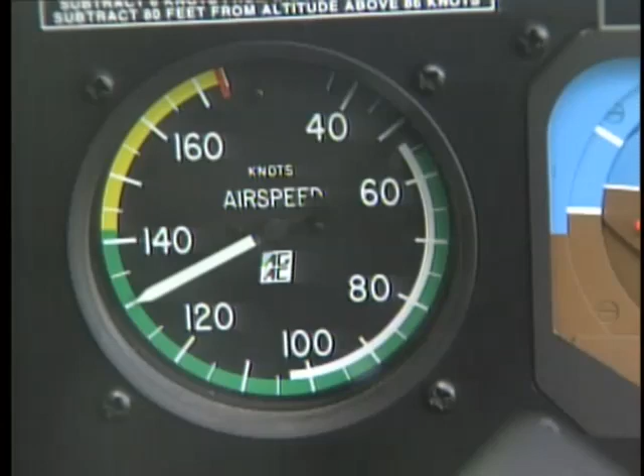The reason that the aircraft instruments are color-coded is to direct your attention, as the FAA says, to approaching operating difficulties. What that basically means is that for engine instruments, you'll have colored arcs, green arcs for normal operating range, yellow arcs for caution areas, red lines for you don't want to operate above or below this as far as temperature or pressure is concerned. And also on the airspeed indicator, you've got color-coded arcs. And the reason is so that the pilot has, at a real quick glance, information about whether he's operating in an area in a spectrum where he should be.

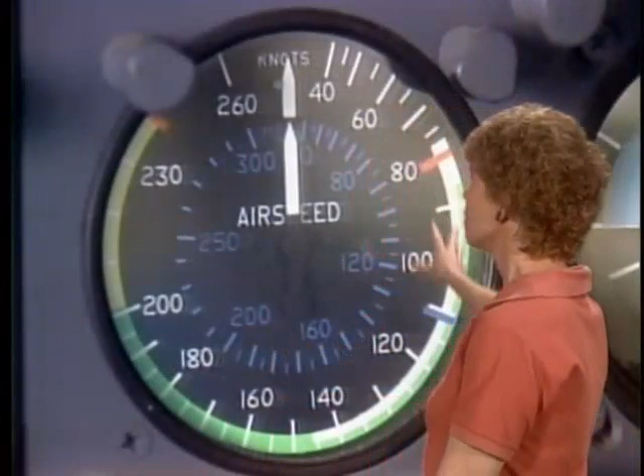Now, those aircraft instrument range markings, as the FAA calls these colored arcs, are specified by federal aviation regulations. It's not just a case of the manufacturers got together and said, let's do it this way. The federal aviation regulations require that those range markings, those colored arcs, be on there. A couple of instruments that you'll see that have those range markings on them are the airspeed indicator. Notice we have white arc, green arc, red lines, yellow arc, a blue arc, and so on there. And also another place you're going to find it is the cylinder head temperature gauge. Temperature gauges very typically have those colored arcs also.

So the red radial line on any instrument indicates the maximum, or if it's on the bottom end, the minimum safe operating limits. Now, airspeed indicators for twin-engine airplanes have, among other markings, a blue radial line. And what that blue radial line indicates is the best rate of climb speed with one engine inoperative. On a multi-engine aircraft, it's very important to know very quickly what the best speed is, the best rate of climb speed, if you have an engine failure. And they don't want you to have to look it up in a book or search for a placard, so they mark it right there on the airspeed indicator with that blue radial line.

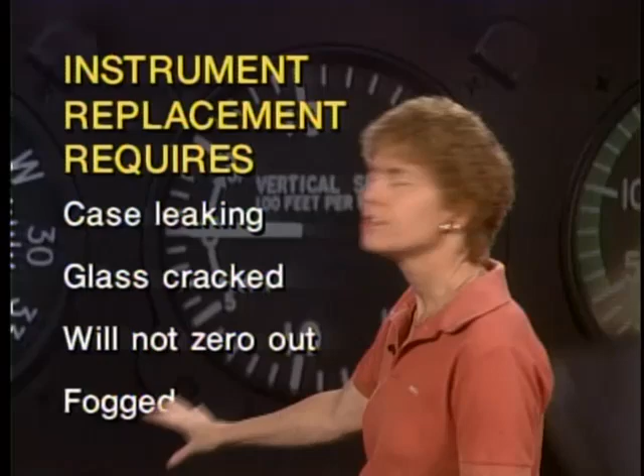But there are some instrument discrepancies that would require replacement of the instrument instead. Discrepancies that would require instrument replacement would be: the case itself is leaking, the glass in the instrument is cracked, the instrument will not zero out, or the instrument is fogged. These kinds of problems will require replacement of the instrument, and they're not the type of thing that an aviation mechanic can work on. Now, a certificated mechanic can perform 100-hour inspections of instruments.

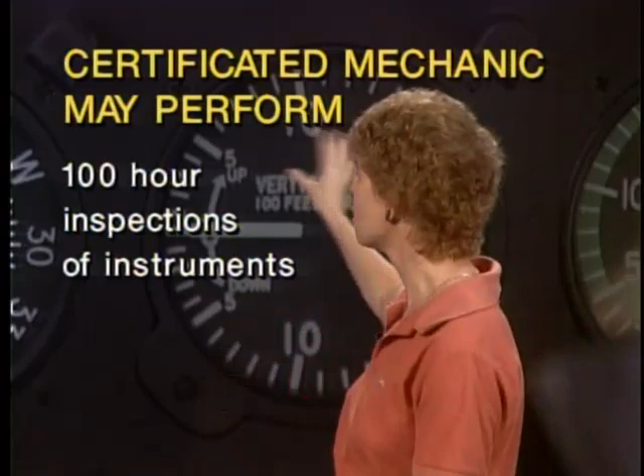You are allowed, and indeed you must, inspect the instruments when you do various inspections and see whether the instruments look like they are complete and whole and whether they're functioning properly. However, a mechanic, even if he's got an airframe and a power plant rating, may not perform repairs on aircraft instruments. A mechanic cannot perform repairs on engine instruments, or for that matter on flight instruments. That has to be done by a repair shop.

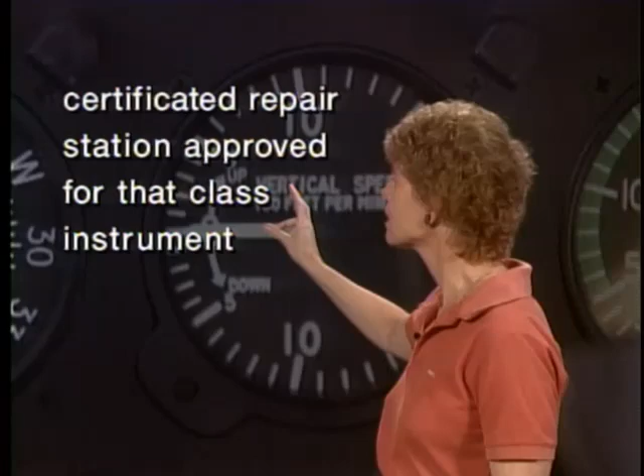So basically what the mechanic does is inspect the instruments, see if there's any problems, and if there are problems which would require taking the instrument apart in order to fix it, then he's going to simply have to replace it and let a repair shop do any repair work or overhaul on the instrument that needs to be done. Because repair of an aircraft instrument can only be done by a certificated repair station that is approved for that class of instrument. An aviation mechanic cannot repair instruments. Only a repair station can do that, and they have to be approved for that class of instrument.

Okay, let's talk about the instrument panel. The panels that you mount the aircraft instruments in are usually shock mounted, and the reason for that is to absorb low frequency, high amplitude shocks. You need to remember those two words, low frequency and high amplitude, because those are the type of shocks that you put the instrument panels on shock mounts in order to absorb.

Now, how many shock mounts are you going to have? Well, the number of shock mounts that are needed for an instrument panel installation is determined by the weight of the complete panel unit. And by complete panel unit, that includes the instruments, but it also includes all of the sheet metal and so on. So the weight of the complete unit is what determines how many shock mounts you're going to need.

That aircraft instrument panel, by the way, needs to be electrically bonded to the aircraft structure. And the reason that it is electrically bonded to the aircraft structure is not to keep it from bouncing around, that's done by the shock mounts, but it's to provide current return paths. That's the reason for electrical bonding.

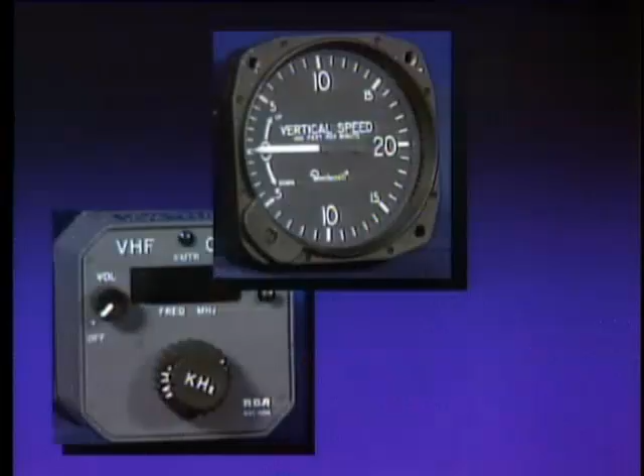Now, the way that aircraft instruments are mounted in their panels depends on how the instrument case is designed. If you've got an instrument like this vertical speed indicator that has a flange on it, then what you use is mounting screws going through that flange. But sometimes what you'll have instead is a flangeless instrument case, and we've got a sample of that here in this radio case.

Notice that there is no flange around it, and if you have a flangeless instrument case, the way it's mounted in an instrument panel is there is an expanding type clamp that is secured to the back of the panel. You slide the instrument in, and then you tighten that clamp around the instrument, in this case around the radio, by a screw from the front of the instrument panel.

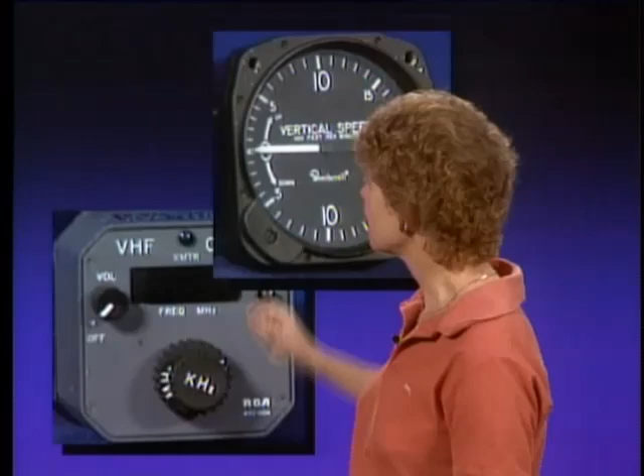So with a flangeless instrument case, what you've got is an expanding type clamp on the back of the instrument panel, and that clamp is tightened down around the instrument by a screw, and you do that from the front of the instrument panel.

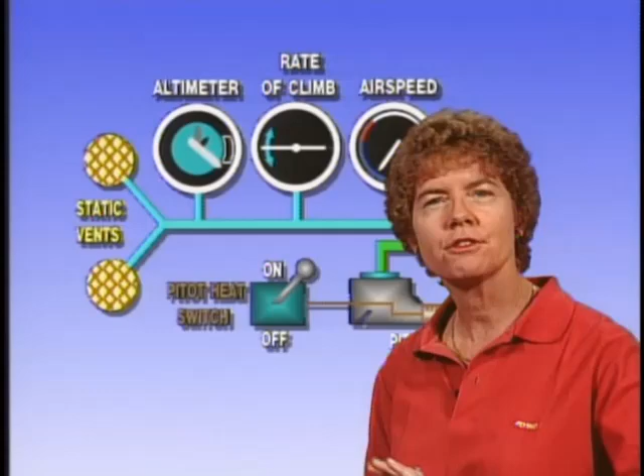Let's talk about the altimeter and the other instruments that are connected to the aircraft's pitot-static system. There are 3 flight instruments that are connected to the pitot-static system, and those are the altimeter, the rate of climb or vertical speed indicator, you'll see both terminologies, and the airspeed indicator.

The pitot-static system has a static vent on either side of the fuselage joined together in a Y, and the reason you've got one on either side is so if the plane yaws one way or another, the increased pressure on one side will be made up for by the decreased pressure on the other. So you'll have a pretty good accurate reading of ambient pressure.

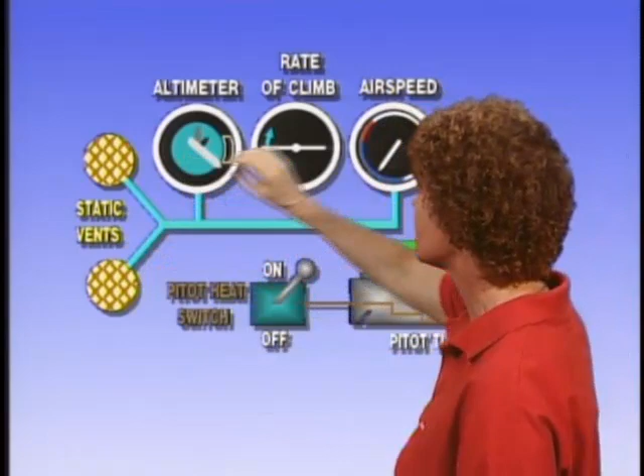They join together and run forward to give static air, static pressure to the altimeter, the vertical speed indicator, and the airspeed indicator. Now notice that the airspeed indicator is the only one of these that has ram air coming in through the pitot tube. And what the airspeed indicator is doing is taking this ram air coming in through the pitot tube and comparing it against the ambient or static pressure air, and the difference gives you the airspeed indication.

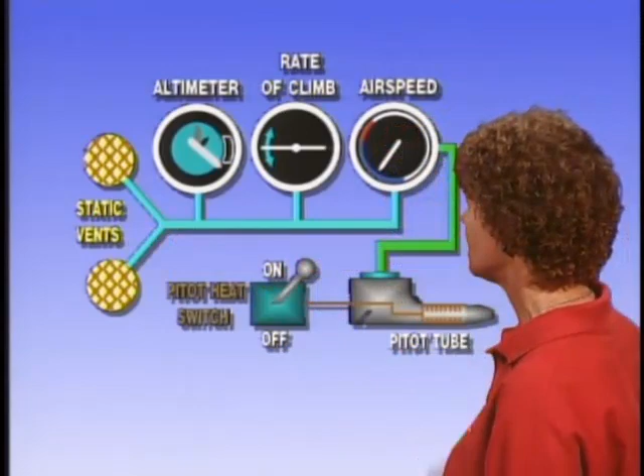On the vertical speed indicator and on the altimeter, they're simply sensing the ambient pressure, and telling you whether you're climbing or descending, and giving you your altitude above mean sea level. Normally is how the altimeter is set to give us our altitude. So there are 3 instruments connected to the pitot-static system: the altimeter, vertical speed indicator, and airspeed indicator.

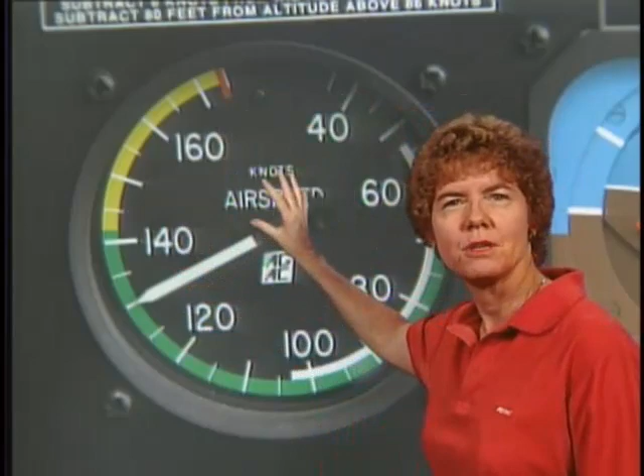But suppose the FAA asks you which of these instruments are connected only to the aircraft's static pressure system. There are 2 of them that are only connected to the static pressure and not to the pitot or ram pressure, and those 2 are the altimeter and the vertical speed indicator or rate of climb. The airspeed indicator is connected to both the ram air, the pitot air, and the static air pressure. And by measuring the differential, as I said, between the pitot pressure and the static air pressure, it will tell you what your indicated airspeed is.

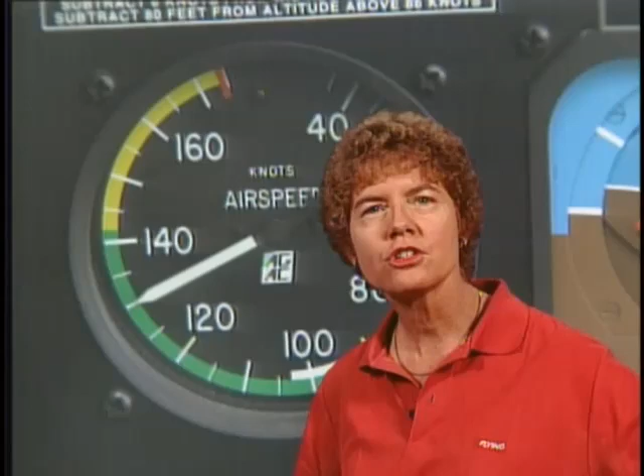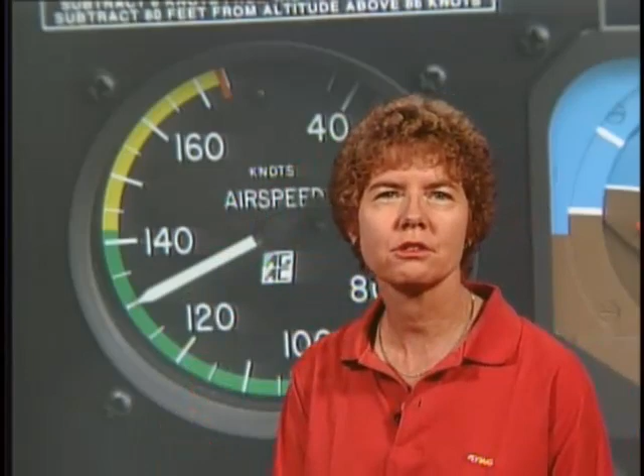Now, both the ram air and the static air are external air sources outside the cabin of the aircraft. So cabin air pressure has no effect on the airspeed indicator whatsoever unless you have a certain kind of problem. Suppose that you have a pressurized aircraft. And the static pressure line became disconnected inside that pressurized cabin during cruising flight.

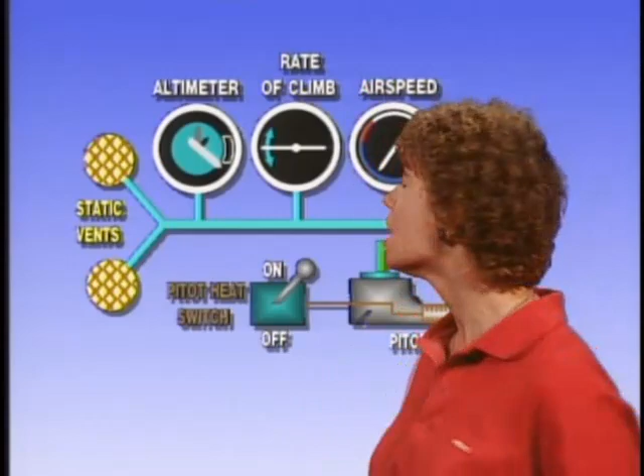The question is, what will happen to the altimeter and the airspeed indicator if this static line becomes disconnected in a pressurized cabin? Well, the whole idea of a pressurized cabin is that while you may be flying at, say, 20,000 feet, you'll only have a cabin altitude of, say, 6,000 feet. It's pressurized to give you a lower cabin flight altitude. If the static line becomes disconnected in the cabin, then it's going to be filled with air at the cabin pressure, which is a 6,000-foot cabin, and not the external air pressure of, say, 20,000 feet.

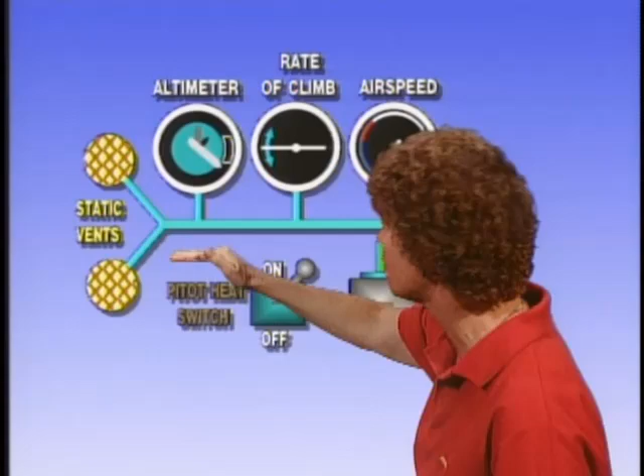So if you have pressurized air inside the static vent from a pressurized air cabin, what will happen is that the altimeter will read the same as the actual cabin altitude, not your flight altitude, and the airspeed indicator will be wrong. The altimeter will read low because the cabin altitude is 6,000 feet instead of 20,000 feet, so it'll read 6,000 instead of 20,000.

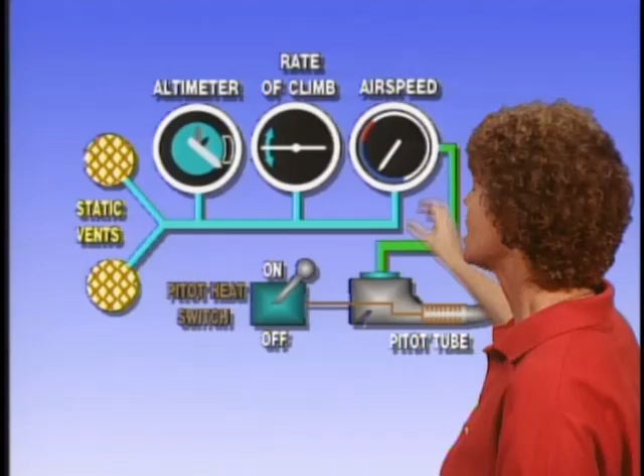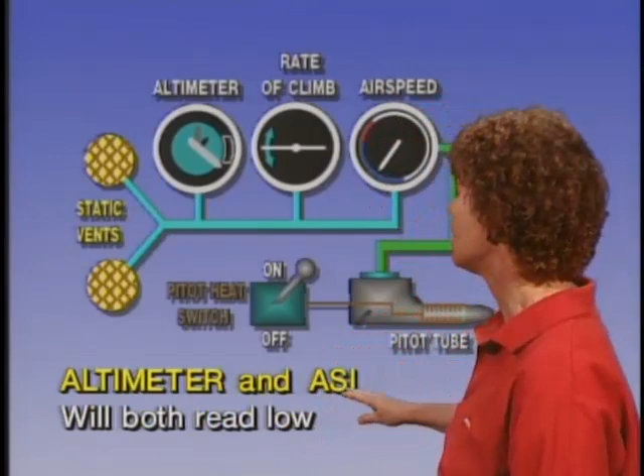The airspeed indicator is taking the ram air coming in here and comparing it against the air in the static vent, but if the air in the static vent is pressurized cabin air, it's going to be a much higher pressure than you would expect, and the difference will be much less, and the airspeed indicator will read low. So if the static pressure line is disconnected inside a pressurized cabin in cruising flight, the result you'll get is that both the altimeter and the airspeed indicator will read too low.

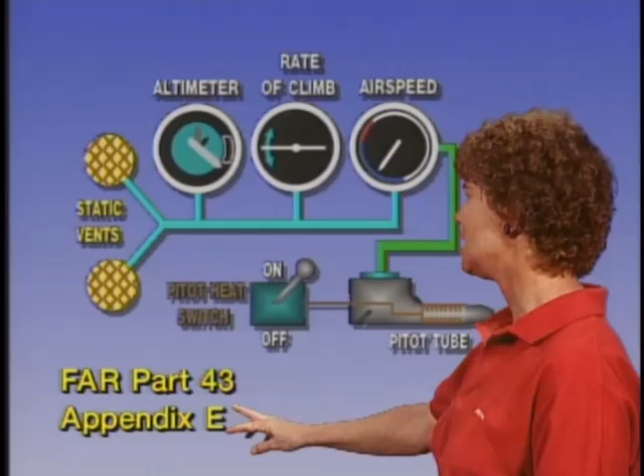Now the static system, the pitot-static system, has to be tested and inspected according to regulation. The regulation that requires it is FAR 91.411. But the requirements on how to test it and how to inspect it, they want you to know where to find those, and you find those in FAR Part 43, Appendix E. FAR Part 43, Appendix E is what tells you how to test the static pressure system on an aircraft.

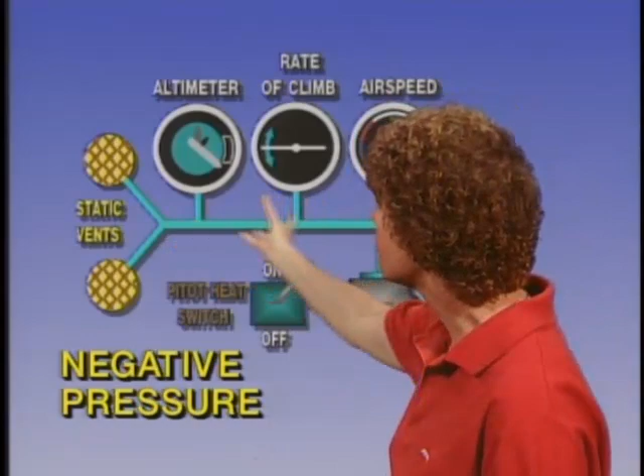One of the things that it tells you is that when you're performing the static system leakage test, what you're using is suction, or as they say on the test, negative pressure. You apply suction in the static lines, and what you're doing is you're checking for leaks. Does the system leak? Will it hold the suction without giving erroneous readings? If you test this system for leaks in compliance with the regulation, you can do it one of two ways.

You can use a pitot-static system tester that has altimeter and VSI indication, or you can actually use the aircraft altimeter instead. What you do is you apply the suction onto the static system and you watch and see what the aircraft altimeter does. You apply a suction to an equivalent altitude, and they'll tell you on the tester exactly what that equivalent altitude is, and then you hold the system there and you look for the rate of change on the altimeter. What you're looking for is, does the altimeter move when you're not actually changing the suction? That will tell you whether or not you have a leak.

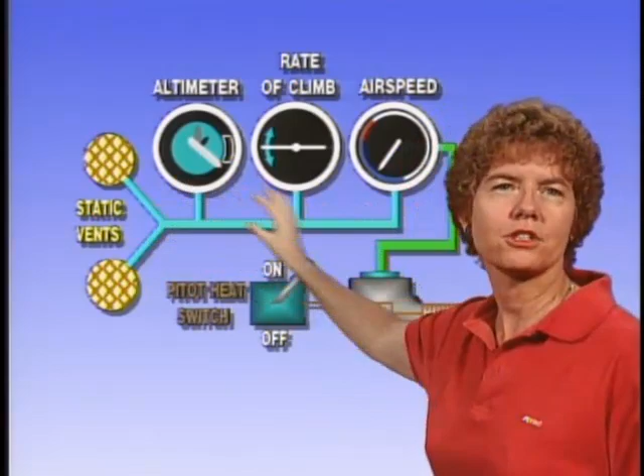The maximum altitude loss that is permitted when you're doing this instrument static pressure integrity check, leak check, is 100 feet in 1 minute. So if the altimeter is showing more than a 100-foot change in 1 minute, then you've got excessive leakage in that instrument system. Now, if the static pressure system does show excessive leakage, how do you locate it? You locate the leaks by going in and isolating different parts of the line, and then you test each portion systematically, starting with the instrument connection, to try and figure out exactly what segment of the lines, what segment of the connections the leak is located in.

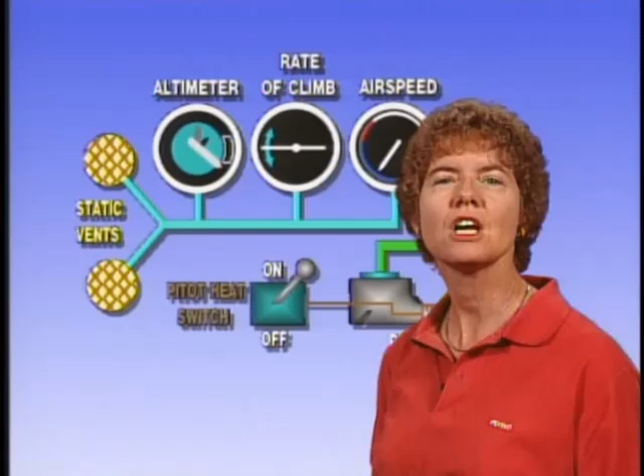Now, they want you to be familiar with the concept of pressure altitude. A barometric altimeter like this will indicate pressure altitude whenever the scale on the altimeter is set to 29.92 inches of mercury. And it doesn't make any difference whether you're on the ground or in flight. If you go to the setting window on the altimeter and you set it to 29.92 inches of mercury, the altimeter will be telling you your pressure altitude. And that's important because you use it for some diagnostic information and also as a pilot to find out how the aircraft is going to be performing.

A different type of altimeter other than the barometric altimeter is a radar altimeter. And what a radar altimeter does is it transmits a signal from the aircraft which goes down to the ground and is reflected back to the aircraft. And the instrument analyzes that signal and says, okay, I am 100 feet, 500 feet, 800 feet, 1,000 feet above the ground. So rather than knowing your altitude just above sea level, the advantage of the radar altimeter is it tells you how high you are above the ground that you're passing over at the moment and helps an awful lot in obstruction clearance.

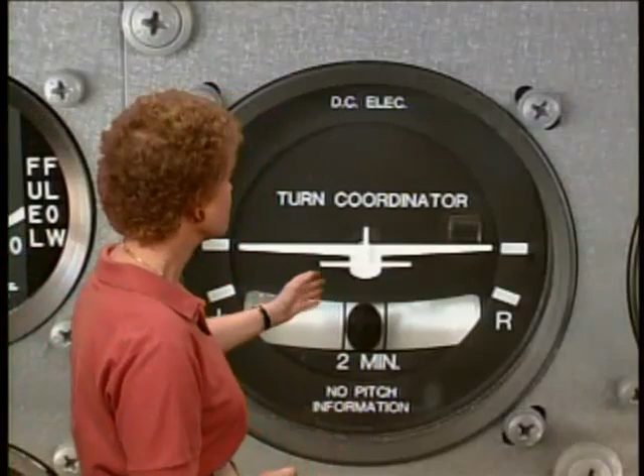Now, one of the flight instruments in the cockpit is a turn coordinator, and the turn coordinator tells two pieces of information. It tells about roll and it tells about yaw. As far as roll is concerned, it tells you whether you're rolling into a left-hand turn or whether, as in this case, you're rolling into a right-hand turn. Notice how the right wing of the aircraft goes down, showing a right-hand turn.

So that's the roll. The second thing, as I said, is the yaw indication, whether the nose of the aircraft is yawing to the left or to the right, and it does that with this ball in the tube down here, and it does that by having the ball out to one side or another, depending on which way the nose of the aircraft is yawing. What the turn coordinator does not tell you, and it says right on it, is no pitch information. It does not tell you whether the nose of the aircraft is pitched up or pitched down.

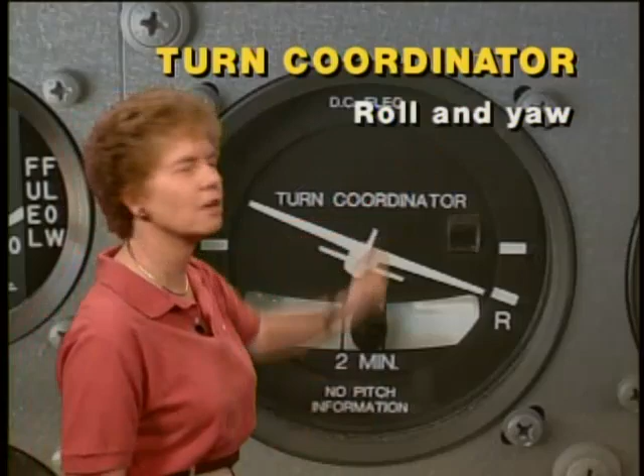What it does tell you is roll and yaw information. Now, when you look at all of the flight instruments in the aircraft panel, in addition to the turn coordinator that we just talked about, there's two others that are gyroscopic instruments controlled by gyroscopes, and that is the attitude indicator and also the heading indicator. So there are three instruments total. Need to remember that number, three of them, that are controlled by gyroscopes.

The attitude indicator, which is often called the artificial horizon, the heading indicator, or the directional gyro, which tells you which direction the airplane is flying, and in older instruments, the turn needle of the turn and slip indicator, which works just like the turn coordinator, but has a needle instead of a little airplane.

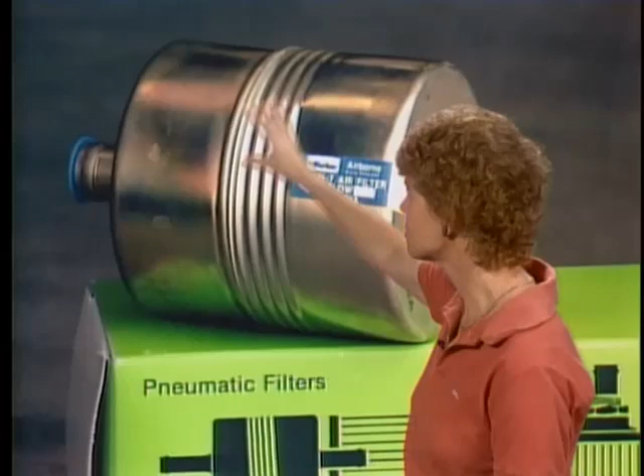Now, the heading indicator and the attitude indicator are normally vacuum-operated instruments, and the vacuum system is very touchy as far as needing clean air is concerned. They have dry-type vacuum pumps with carbon vanes very commonly, and those dry-type vacuum pumps with carbon vanes are very susceptible to damage. What they have to have is good filters on them. Here's the master filter for a vacuum system. The pumps are very susceptible to damage from solid airborne particles, and they have to take in only filtered air. They need a good filter on there to make sure that they don't get contaminants in there.

Now, if you're looking at a vacuum-operated instrument and you find that the glass is loose on that instrument, can you as a mechanic repair it? No, you're not allowed to repair instruments. You're going to have to install another instrument, because remember that only instrument shops are going to be able to work on the instruments. A repair station that's licensed for that class of instrument is going to have to do the repair. What you're going to have to do is install another instrument.

Now, the condition that is most likely to cause excessive vacuum in a vacuum system is the vacuum relief valve not being properly adjusted. If the vacuum relief valve is improperly adjusted, then you could end up with excessive vacuum. You set it for what the system pressure ought to be, and if it's not set properly, then you can get too much vacuum.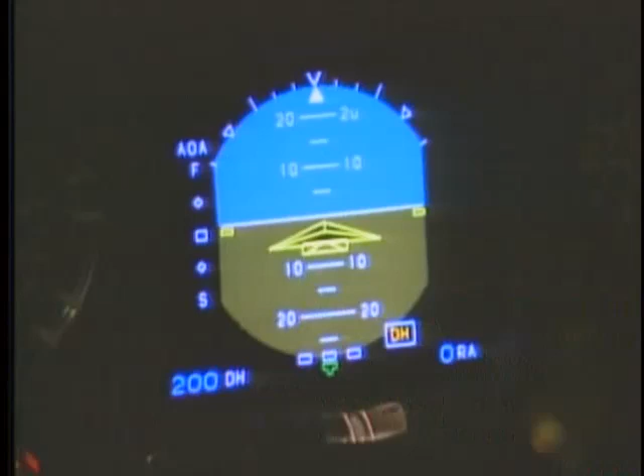Now, this is the wave of the future on instruments, the electronic flight instrument system. An electronic flight instrument system, or EFIS, uses sunlight-readable CRTs like this in order to display data and also representations of aircraft instruments. By using the EFIS, they eliminate all kinds of mechanical instruments, and it relieves pilot workload and instrument panel clutter, because the advantage of an EFIS like this is it only displays the information that you need at the time, and you can change what is displayed on it.

And if you have some kind of mechanical problem with the aircraft, then and only then will the appropriate instruments and gauges and so on show up on the CRT. Now, there are 4 elements in an EFIS system, and you need to know this for the test. The elements are the CRT display, the symbol generator, the display controller, and the source select panel.

The CRT display is this screen that we've been looking at. What happens is that data that is transmitted between the different components in the EFIS is converted into digital or alphanumeric signals. That data is then displayed on the CRT, the cathode ray tube, and it's displayed as both alphanumeric data and also as representations of aircraft instruments. In other words, you'll actually see a symbol, a picture of a particular aircraft instrument, or you will see alphanumeric data depending on exactly what you need to be looking at the moment. And that's all displayed on the CRT.

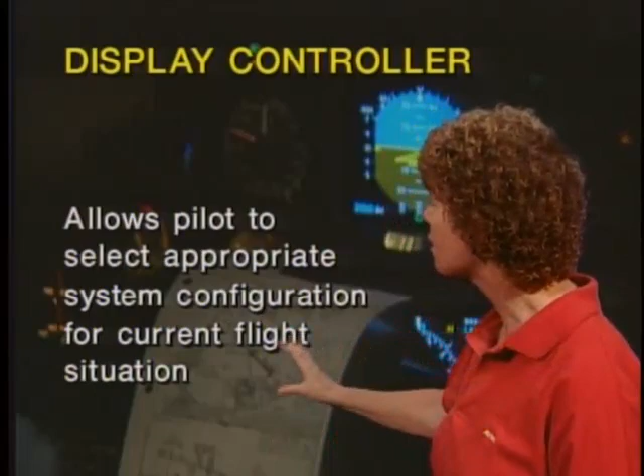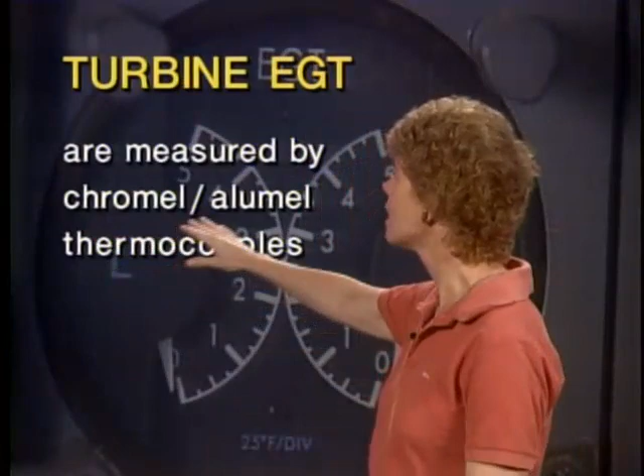Let's talk about our temperature indicators. First of all, exhaust gas temperature gauges. Exhaust gas temperature gauges tell you what the temperature of the air is going out the engine exhaust. Now, if you're measuring turbine exhaust gas temperatures, then you've got to use some special thermocouples. Chromel-Alumel thermocouples are used for turbine EGT, exhaust gas temperature measurements.

And by the way, thermocouple leads are designed for a specific installation, and they cannot be altered, because if you alter them, if you change them, you're going to change the electrical currents in them, and then they're not going to work the way that they were designed to do.

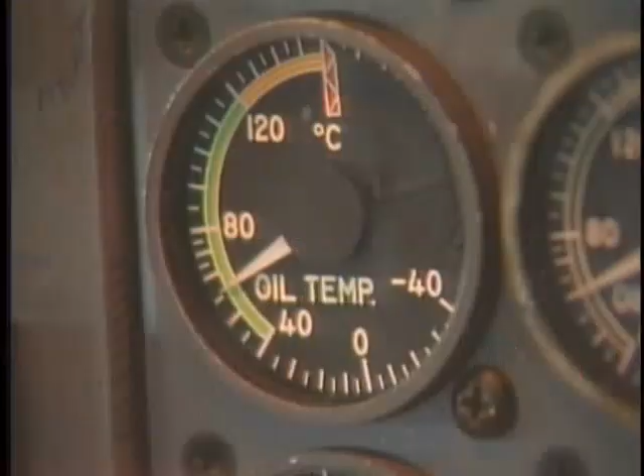Now, let's assume that instead of measuring EGT, what you want to do is measure something like the oil temperature in the engine. You're going to use a different type of temperature indicator to do that, because you're working with much lower temperatures than if you were measuring EGT. The type of temperature indicator that you would use for oil temperature, as well as some other things we'll talk about, is a resistance type temperature indicator. Using a Wheatstone bridge or ratiometer circuits, a resistance type temperature indicator can be used to indicate the temperatures of things like free air, carburetor air, engine coolant, or, as we have in this gauge, oil temperature.

The reason that you use resistance type temperature indicators for measuring these kinds of temperatures is because they are much lower temperatures than EGT or CHT, than the exhaust gas temperature or the cylinder head temperature, and thermocouples will not work at these much lower temperatures.

The FAA will give you a list on the test and ask you what types of temperatures you can measure with resistance type temperature indicators. What you can measure is things like free air temperature, carburetor air temperature, engine coolant temperature, or oil temperature. What they want you to know that you cannot measure with resistance type temperature indicators are things like exhaust gas temperatures, EGT, and cylinder head temperatures, CHT.

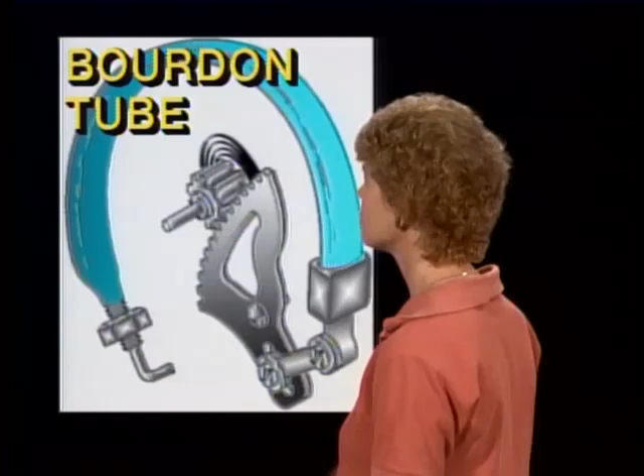Now, when you have aircraft like an MU-2 that have hydraulic systems in them to operate various components, you're going to need to have hydraulic pressure gauges to tell you what the pressure is in that hydraulic system. And the hydraulic pressure gauges will typically be a Bourdon tube. And with a Bourdon tube, basically what you've got is a tube that will tend to straighten out with an increase in pressure or in temperature, and that drives the indicating mechanism. So a Bourdon tube instrument like this can be used to indicate either pressure or temperature, as in a hydraulic pressure gauge, or it can be used for indicating temperature.

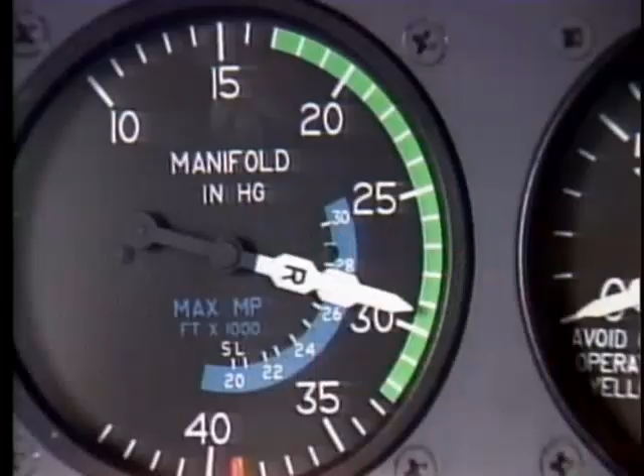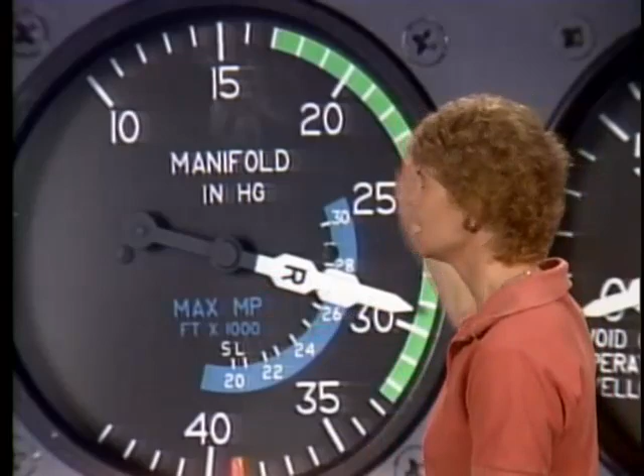Now, the manifold pressure gauge on a reciprocating engine is measuring the absolute pressure inside the engine manifold. And when the engine's not operating, what it's basically going to be showing is existing atmospheric pressure. Existing atmospheric pressure would normally be about on the order of 29.92. That's about what this manifold pressure gauge is showing. So when the engine's not running, what that gauge is going to indicate is simply the existing or ambient atmospheric pressure.

Now, because the magnetic compass is supposed to show you your direction relative to magnetic north, you want to make sure that you keep any magnetic items away from that compass, particularly anything that's going to stay with it. So cotter pins, if you're going to use them in close proximity to a magnetic compass, need to be made of corrosion-resisting steel.

What you don't want to use is anything magnetic, because that's going to throw the compass off. So use cotter pins of corrosion-resistant steel in proximity to that magnetic compass. Now, a magnetic compass is swung at specified operating intervals by you as a mechanic, and the reason for swinging the compass is to figure out and compensate for magnetic influence or compass deviation.

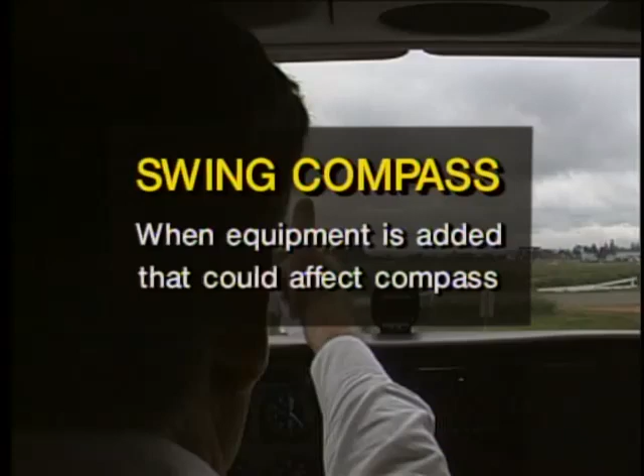There are magnetic fields in the aircraft put up by the engine and various other components of the aircraft, also magnetic fields from the radios if the radios are on, and those are going to have an influence on the compass. And so what you try and do is adjust the compass, and there are magnets that you use to do that, so that it has the minimum amount of error that you possibly can.

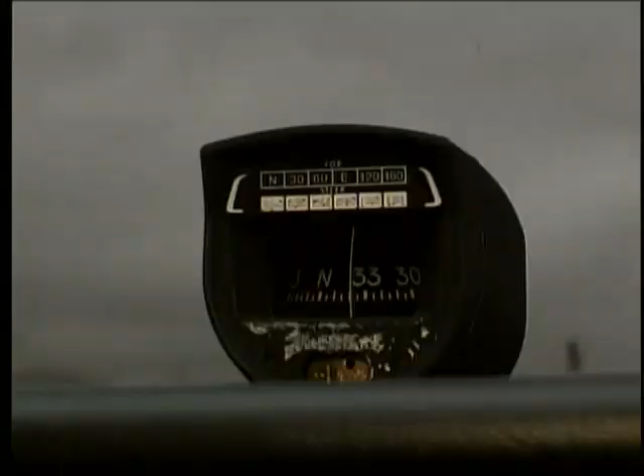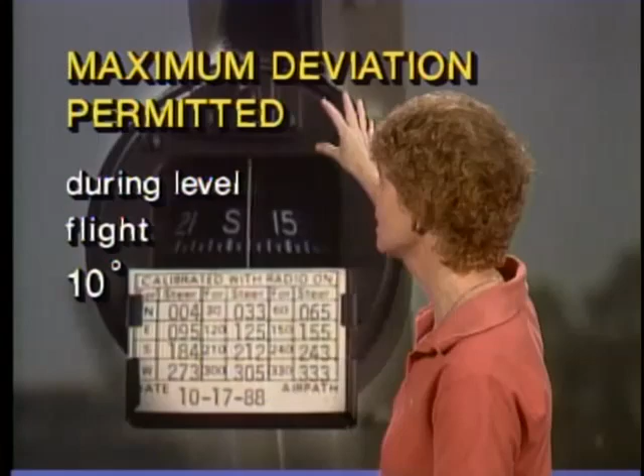The maximum deviation that is permitted during level flight is 10 degrees, meaning the difference between the heading you're actually on and the heading that the magnetic compass says you're on. And so you use adjusting magnets in order to try and get that deviation or error out of the compass. Maximum deviation is 10 degrees.

Well, one type of stall warning system is a pneumatic or reed type stall warning system, like on this Cessna. It's activated when the angle of attack is increased to the point where you actually have negative air pressure inside the slot. You need to know it's negative air pressure, not positive or ambient air pressure. That negative air pressure allows air to flow through the reed and out the slot, and it creates an audible warning indication that sounds like this.

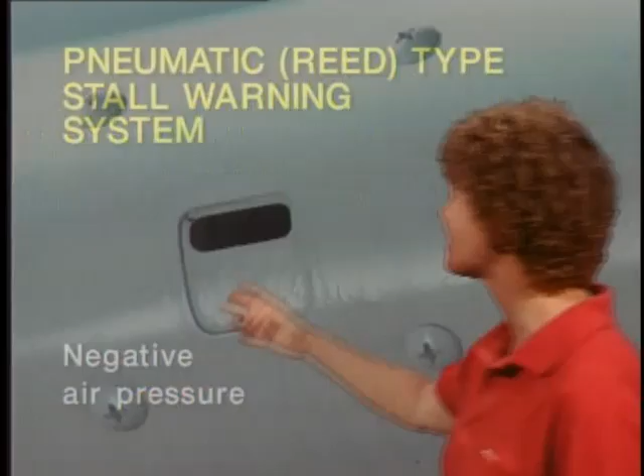Now let's talk about the angle of attack indicating system. The angle of attack indicating system is a very useful system. You find it on jets and also a lot of turboprops, some of the smaller aircraft. And basically what it does is it measures the angle between the local airflow around the direction detector, which is this unit right here, and the fuselage reference plane.

What it's telling you is what kind of angle the aircraft is really at as far as how that aircraft is performing. What is the angle of attack of the aircraft? And it can be a much more useful piece of information than just knowing what the airspeed of the aircraft is, because it tells you more about how close the aircraft is to a stalling condition.

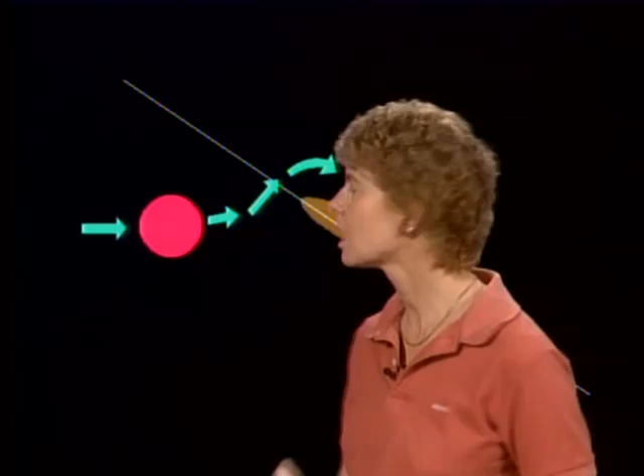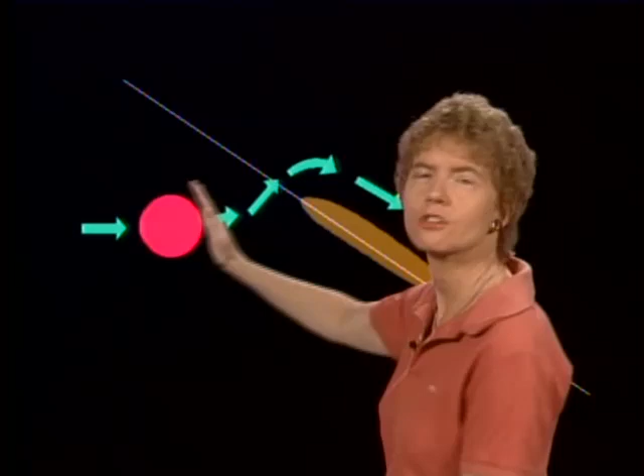So the operation of that angle of attack system is based on measuring pressure differential at a point where the airstream is not flowing parallel to the true angle of attack. This is the chord line of the wing here, and this is the angle of attack indicator, and basically what it's doing is measuring the difference between the way the wing is pointed and the way the aircraft is actually moving, and that's giving you your angle of attack and telling you how close the aircraft is to stall.

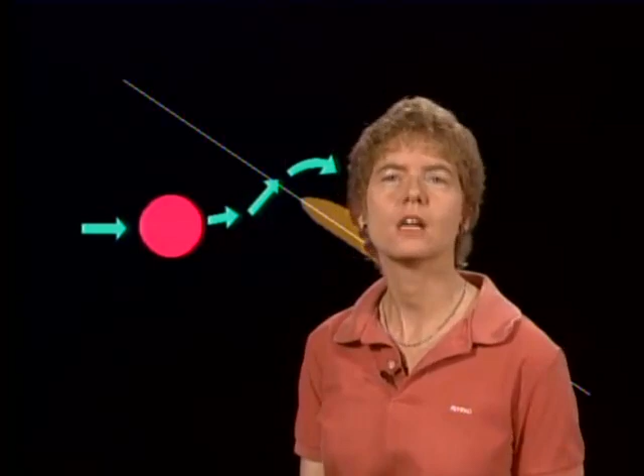Extremely useful as far as figuring out the performance, particularly on a jet. Measuring pressure differential at a point where the airstream is not flowing parallel to the true angle of attack of the aircraft. Let's talk about now synchro-type remote indicating instruments.

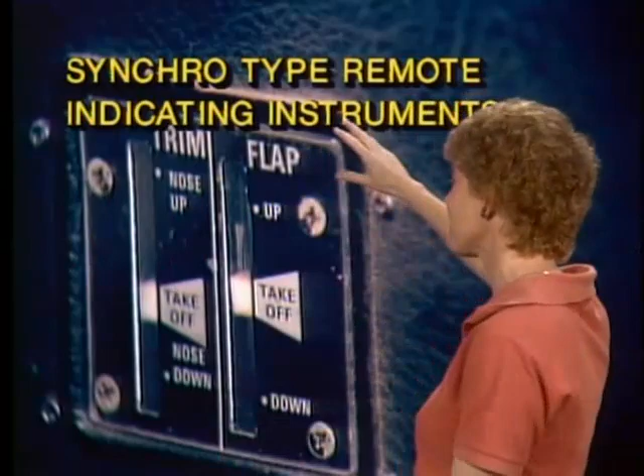Now that's a mouthful, synchro-type remote indicating instruments, but basically it's an electrical indicating system used for transmitting information from one point to another, where you've got a transmitter connected to a receiver electrically with wires, and that's the type of indicating system that's used in this particular case to tell you about the flap position. Let's take a look at a graphic of one type of synchro system, which is a DC Selsyn system.

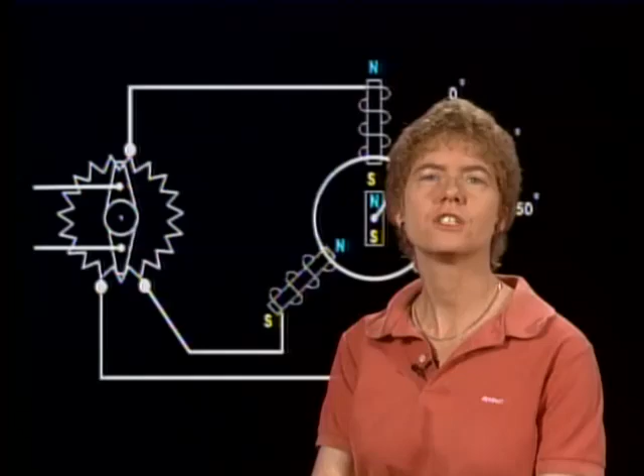On the DC Selsyn system, you've got a transmitter over here on the left, and an indicator over here on the right. The reason they call it a synchro system is that synchro is short for synchronous, and it means that the indicator in the cockpit is going to move exactly the same amount as the transmitter. So basically it's an electrical method of indicating a remote mechanical movement or position, by the indicator moving in synchronous with the transmitter, exactly the same amount.

Now, some of the things that you can use a DC Selsyn system to indicate are the position of retractable landing gear, the position of wing flaps, the position of cowl flaps, or oil cooler door positions, and in some systems, depending on the type of gauges, to indicate fuel quantity.

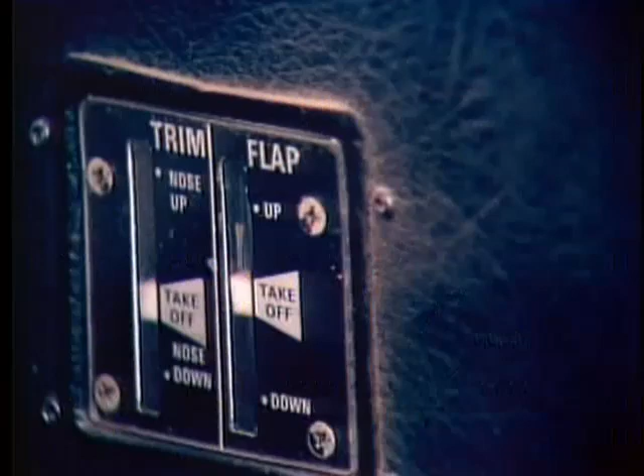Now, another type of synchro gauge that will tell you about flap position and similar things is the Magnesyn system. The Magnesyn system operates almost identically to the DC Selsyn system. The difference is the rotor. The rotor in a Magnesyn remote indicating system uses a permanent magnet in that rotor system.

Now, another very similar system is the Autosyn system. The difference between the Autosyn system and the Magnesyn system is in the rotor, because in an Autosyn system, the rotor is an electromagnet. So basically the difference between these three is in the rotor system.

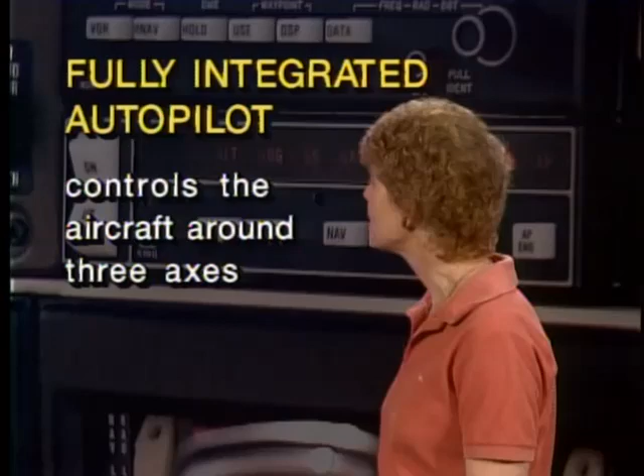Okay, let's talk about the autopilot system on the aircraft. The primary purpose of the autopilot is to relieve the pilot of control of the aircraft for long periods of flight. You get fatigued just having to pay close attention to the controls all the time, and so you turn it over to George here and let the autopilot do it. Now, if you have a fully integrated autopilot in the aircraft, fully integrated means that the autopilot can control the aircraft around 3 axes. It's going to be able to control the bank, the pitch, and also the yaw.

Now, in an electromechanical autopilot system, the sensing device is a gyro. The gyro is sensing what's going on in the aircraft, and it's giving information to the autopilot. It's the relative motion between a gyro and its supporting system that's the operating principle for the sensing device used in the autopilot system. For instance, one of the sensing elements of the autopilot system is an attitude indicator. They'll ask you, an attitude indicator is what kind of element of an autopilot system, and it's part of the sensing element, because the gyro in the attitude indicator is telling the autopilot what's actually happening in the aircraft.

Now, you want to operationally check an autopilot system on the ground. A lot of times you do that for maintenance, and the pilot does before he flies it. But you don't want to do it until after the aircraft's main power has been switched on and the gyros have come up to speed and the autopilot amplifier has warmed up. Then and only then do you want to go ahead and engage the autopilot, because you want to make sure the gyros are up to speed and the amplifier is warmed up before you engage the autopilot.

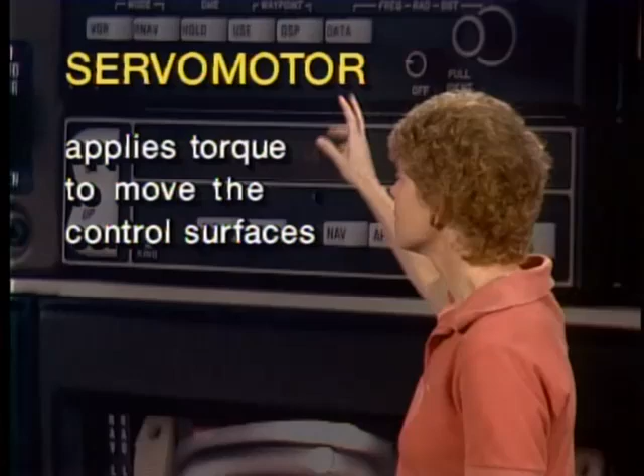Now, the component of an autopilot that moves the control surfaces is a servo motor. The servo motor applies torque to actually move the control surfaces of an aircraft to make the aircraft do what the autopilot is commanding. The channel that detects changes in pitch attitude and controls the aircraft in pitch is the elevator channel of the autopilot. The elevator channel will detect changes in pitch attitude, and it controls the aircraft about the lateral axis. The lateral axis is the one that goes from wingtip to wingtip, and the aircraft pitches around the lateral axis, and that's controlled by the elevator channel on the autopilot.

Now, in the autopilot system, you've got displacement follow-up systems, and the displacement follow-up develops and transmits a negative feedback signal. What that does, this displacement follow-up signal, nullifies the input signal, for instance, to the ailerons. What that means is that when the autopilot commands the ailerons to displace to bank the aircraft, that follow-up signal will then nullify the input and bring the ailerons back to the neutral position.

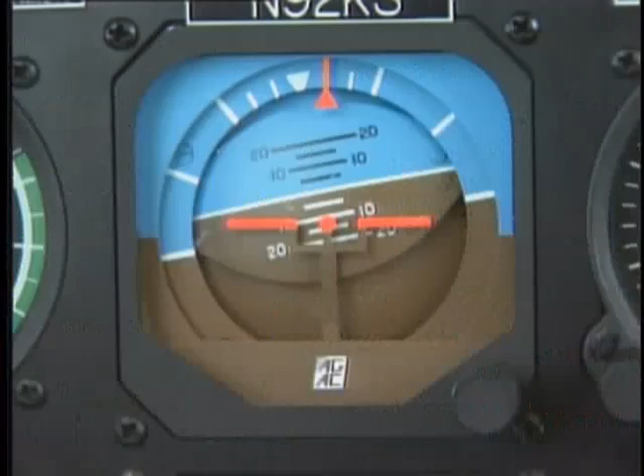Now, let's assume that the aircraft has deviated from attitude or heading, and the autopilot system has changed the attitude or heading in order to correct for that deviation.

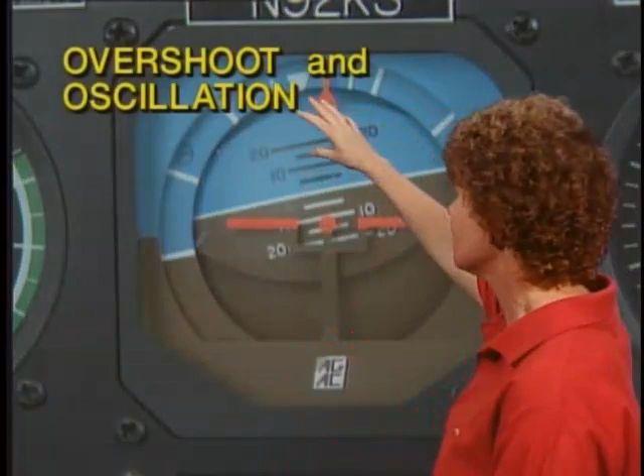But the control surfaces are returned to neutral after the aircraft has returned to its correct position instead of before. What kind of result are you going to get? What you're going to get in that case is an overshoot and some oscillation. There needs to be some anticipation in the autopilot system, because if you wait until after the aircraft is actually back in the correct position, you're going to end up overshooting where you want to be, and you get overshoot and oscillation.

Now, the FAA will be asking you what part of the autopilot system allows you to manually control the aircraft while you have the autopilot engaged, and that is the flight controller, not servos and other parts of it, but it is the flight controller that allows you to manually maneuver the aircraft while the autopilot is engaged.

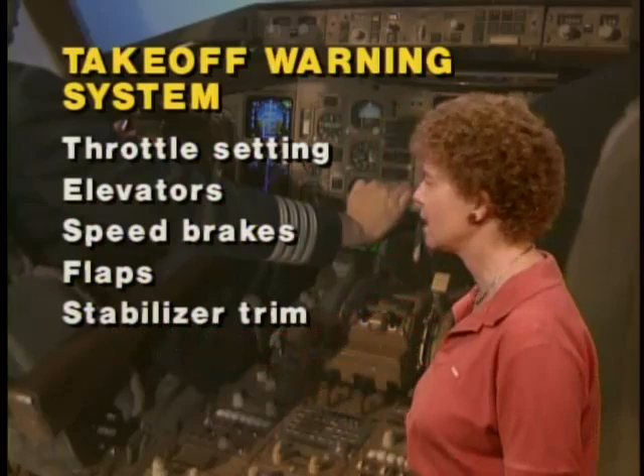What it does not monitor is the ailerons and the position of any aerodynamically actuated slats. If they are aerodynamically actuated, that means that the pilot has no control over them and they'll just do their thing when they need to. So those are not monitored and the ailerons are not monitored. Now, the takeoff warning system, you need to know, is actuated by the closing of the thrust lever switch. All that means is that when the pilot put the throttles forward, he closed a micro switch on the throttle quadrant, and by closing that micro switch, he actuated this takeoff warning system and started it monitoring all those different parameters.

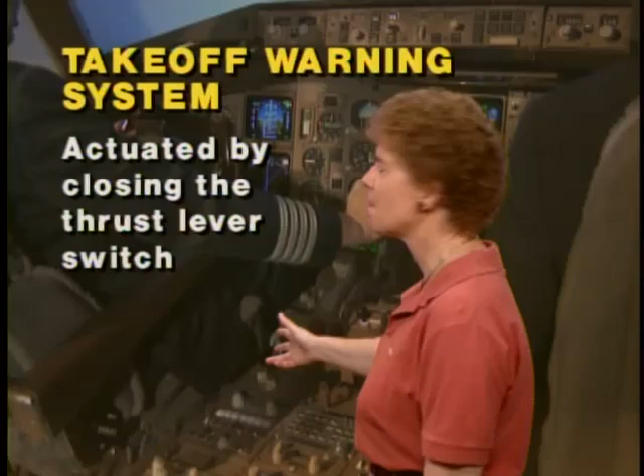Another, a different type of warning, might come up on an instrument such as a horizontal situation indicator, or HSI: red flags for nav or heading or glide slope. And you need to know that when a red flag shows up like that, it means that that particular function is not operative. The function is inoperative. It does not mean you've deviated from what you want to do. It means that function is not working.

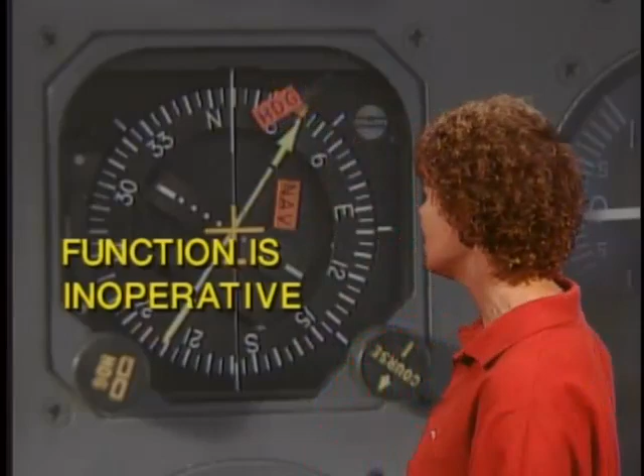You could have a red nav flag only, which means that the heading is working fine, but you have no navigation reception on the indicator. If you have both of them, it means you not only don't have any navigation information, you don't have any heading information either. The function is inoperative. It is not working. And that's what you need to know about aircraft instrument systems.